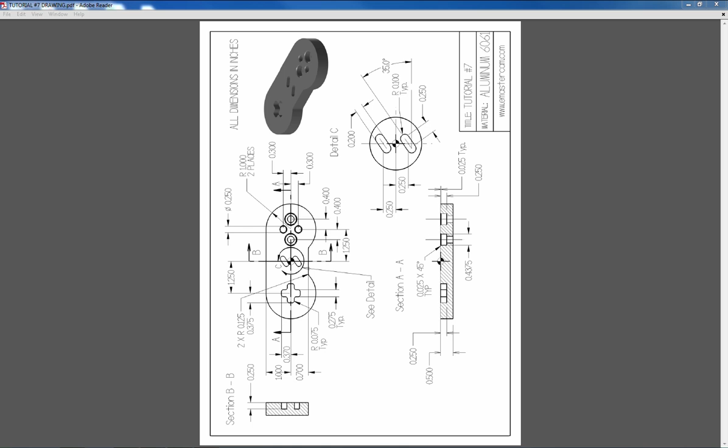Here is the blueprint for tutorial number 7. We will be referencing it throughout the tutorial.

Hello everyone and welcome to Mastercam X9 training tutorial number 7 in the Mill Essential series. As you just saw from the blueprint, that is the part we will be creating in the CAD functions. I've gone ahead and established my grid and changed my default color from a light green to a dark blue. I did this in step 1, setting up the graphic user interface.

Now I'm going to get started with step 2, which is create circle center points. Come up to the top here and select Create, go to Arc, and go to Circle Center Point. From here, we're going to input the radius of 1 and hit Enter on our keyboard.

We are also going to lock in the value. After locking in the value, go over to Fast Point and type in the values -1.25 separated with a comma and 0. Once this is done, scroll over to the right hand side and hit Enter on your keyboard, and then hit Apply.

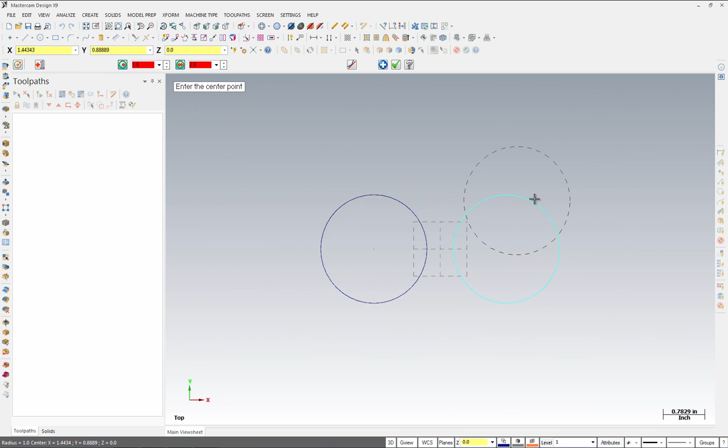From here, we are also going to make another one right beside it. So go to Fast Point again, and this time enter the values 1.25, 0, and hit Enter on your keyboard. As you can see, it's made for us on the other side. Select OK when this is done, and Fit to Screen, so we can see the part more clearly.

From here, go to Create, Line, and Point. We will go ahead and make sure that Tangent is selected. We will select the circle here, and make a tangent to this circle here. Once this is done, select OK. Your part should look as shown.

The next step, we will go Create, Line, Parallel. Once we select the parallel line, we will grab this line that we just made tangent and click somewhere down here. We will go to the distance and insert the value 1.7 and hit Enter on our keyboard. Once this is done, select OK.

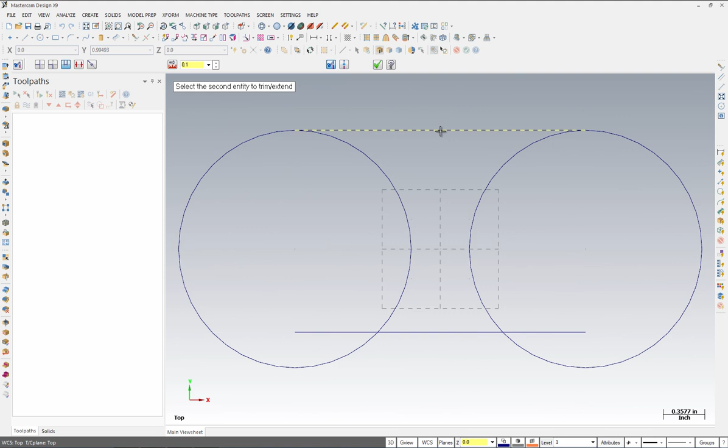The next step, go to Create, Edit, Trim Break Extend, and change the Trim Break Extend to 3 entities. Once this is done, ensure that Trim is also selected on the right hand side. Select Entity A, followed by Entity B, and Entity C.

Do the same for the next side. Select A, select Entity B, and then select Entity C. Your part should look as shown. Select OK when this is done.

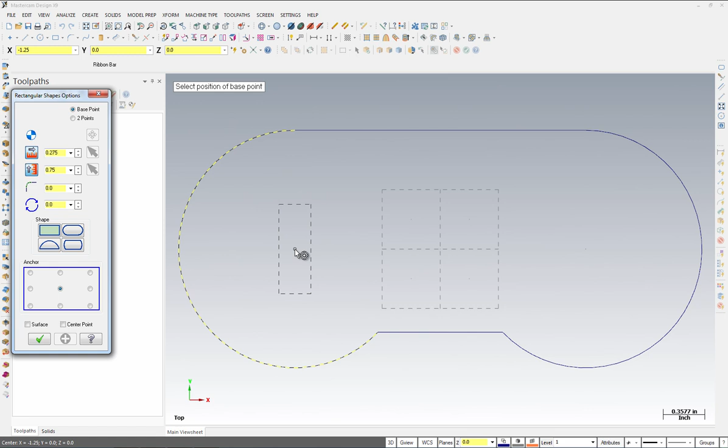Go to Create, Rectangular Shapes. Once this dialog box is opened, change the width to 0.275 and change the height to 0.75, and hit Enter on your keyboard. Also change the anchor to center. Once this is done, come over to the side here and select the circle center point. Select Apply.

Now we will go over and this time change the value of the rotation to 90 and hit Enter on our keyboard. From here, we will scroll over and select the circle center point again, giving the same values, which was 0.275 by 0.75, and hit Enter on our keyboard. Your part should look as shown. Once this is done, hit the OK button.

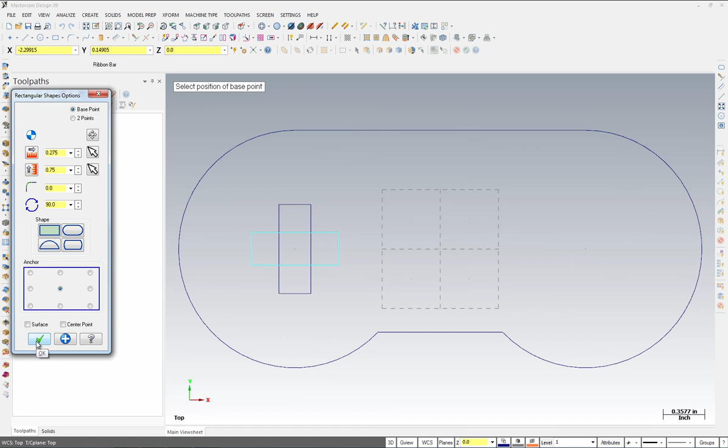Now we are going to trim this geometry. Go to Edit, Trim Break Extend, and select the Divide function. From here, select this line. Continue to go all the way around to clean up the geometry. Your part should look as shown. Once this is done, select OK.

Go to Create, Fillet, and select Chains. Ensure that in the Chaining dialog box, Chain is selected once doing this. Scroll over here, select this chain here, and hit OK. Once this is done, we're going to change the values.

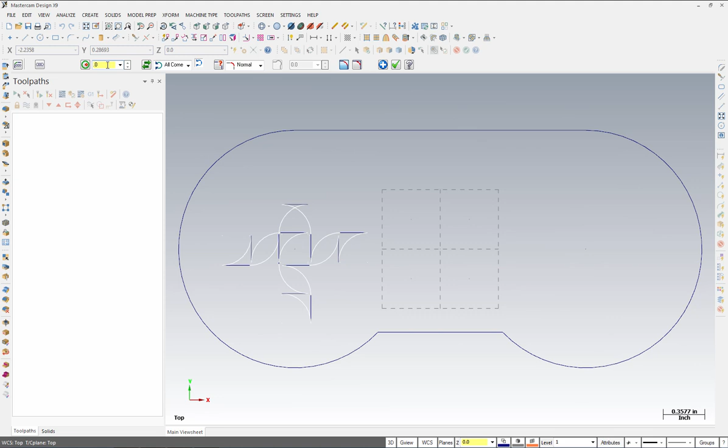We're going to ensure that this value, or radius, is 0.075, and hit Enter on our keyboard. Ensure that the trim function is selected as well. Once your geometry looks like this, select OK.

From here, we are going to create the middle portion of the geometry. Go to Create, Rectangular Shapes, and change the width to 0.45, hitting Enter on your keyboard, and change the height to 0.2. Change the angle to 35, and hit Enter on your keyboard. Since we are making two of these, lock in the values by selecting the icon, width, and height.

From here, we're going to change to this shape, and we are still going to keep it anchored to the center. Once this is done, scroll up to the top without exiting out of this rectangular shape option and select Fast Point. Insert the value 0, 0.25 and select Enter on your keyboard. You should see the geometry as shown.

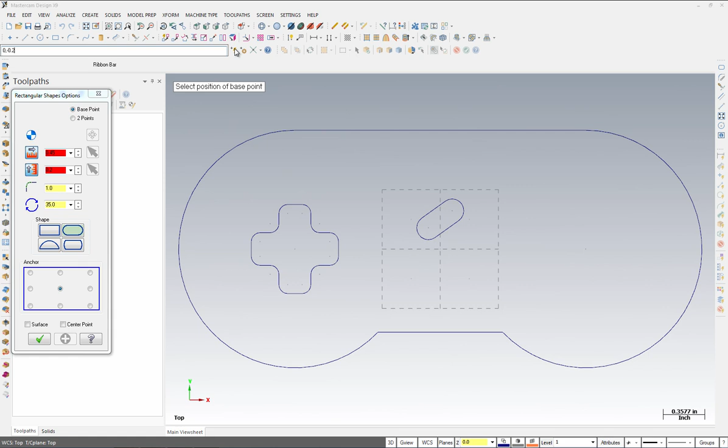From here, select Apply, and go back to Fast Point and type in the values 0, -0.25 and hit Enter on your keyboard once more. When this is done, select OK. Your geometry should look as shown.

Go over to Create and select Circle Center Point. Change the diameter to 0.25. First you need to unlock the value, change this diameter to 0.25, and lock in this value. Once this is done, select the Fast Point.

Type in the value 1.25, minus 0.4, comma 0, and hit Enter on your keyboard. Select Apply.

Go to Fast Point again. This time, type in 1.25 plus 0.4, comma 0. Hit Enter on your keyboard. Select Apply. From here, go back up to Fast Point and type in the value 1.25 separated with a comma.

0.3 and hit Enter on your keyboard. And the last step is to hit Apply one more time, go to Fast Point one last time, and type in the values 1.25 separated with a comma negative 0.3 and hit Enter on your keyboard.

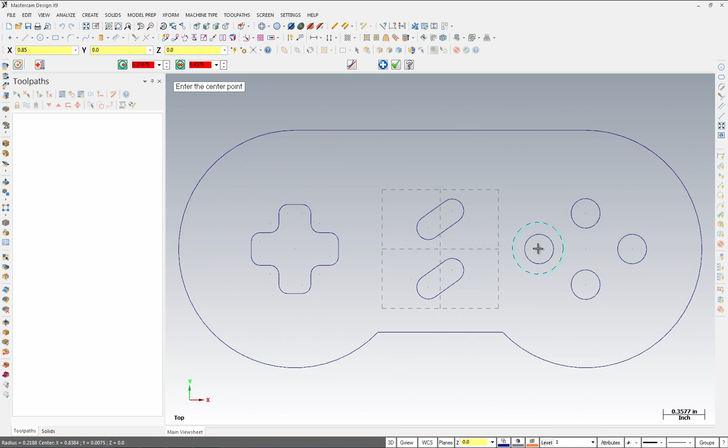From here, we are going to select the circle center point of this circle here, and we are also going to select the circle center point of this point right here. Once this is done, select OK.

From here, we are going to change our attributes at the bottom of the screen. Scroll down to the bottom and select the solid color. From here, select color 12 or red, and select OK.

The next thing to do is to change the status bar and the level. Scroll down to the level and select it. From here, insert the number 2 and change the name to solid. Once this is done, select OK to exit the level manager.

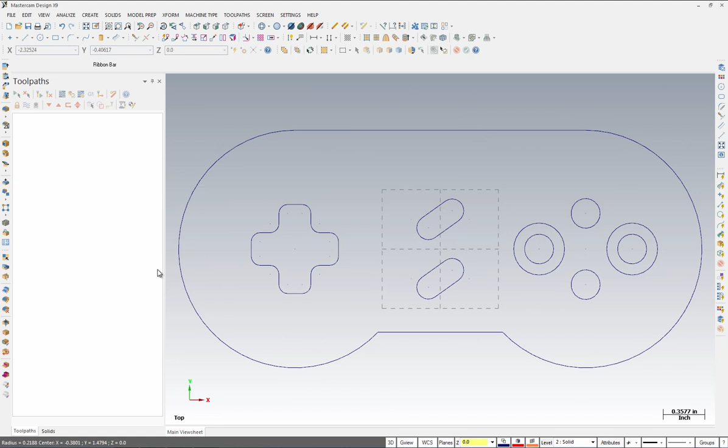Go ahead and start to extrude the surface. In order to do so, go to Solids, Extrude. From here, we are going to keep this same chain under the chaining dialog box, and we are going to select Isometric on the part. Your part should look as shown.

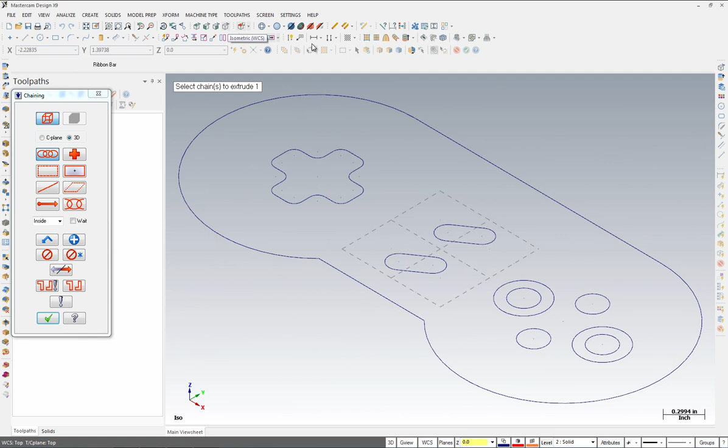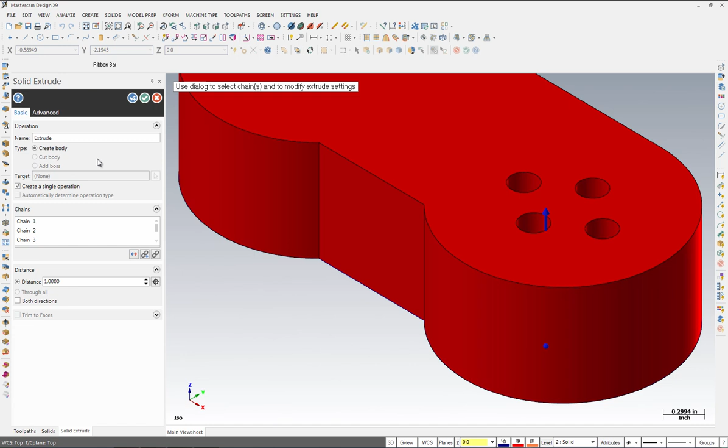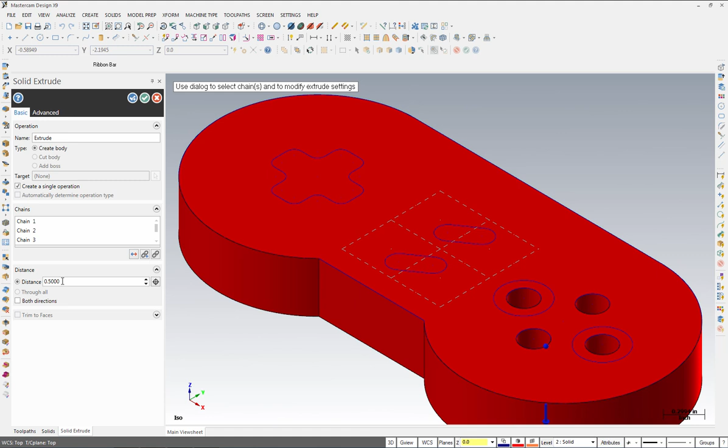From here, we are going to create a single operation, change the type to create body, and we're going to give it a distance of 0.5. Your part should look as shown. When this is done, you can hit Alt-S on your keyboard in order to shade the part. Select OK when finished. Select Fit to Screen as well to see the full part.

Once this is done, go to Solids, Extrude, and select this geometry here, followed by this geometry, this one. I'm going to flip my chain, this circle here, and this circle here. Once this is done, select OK.

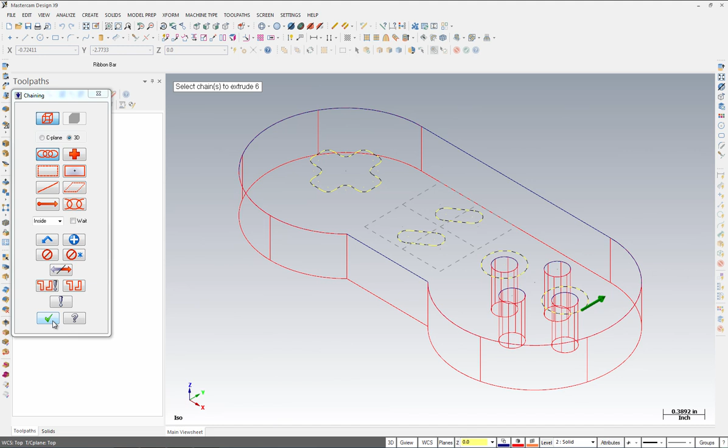From here, instead of creating body, we are going to cut the body and change the distance to 0.25 and hit Enter on our keyboard. From here, we're going to hit OK. I'm hitting Alt-S on my keyboard in order to shade the part once more. Your part should look as shown.

Scroll down to the bottom and select Level, and turn the wireframe off. Once this is done, go over and select OK. And at the very bottom of the screen here, change from Toolpaths to Solids to see your Solids operations. Expand it. You should have an Extrude and an Extrude Cut.

Go to Solids, and scroll down to Chamfer. Go to One Distance Chamfer. Ensure that Face and Body is turned off and you only have Edge selected in this Solid Selection dialog box. Select these holes here. Once all four are selected, select OK.

Change the distance to 0.025 and hit Enter on your keyboard. Once this is done, you will see the chamfer created for the holes. Select OK.

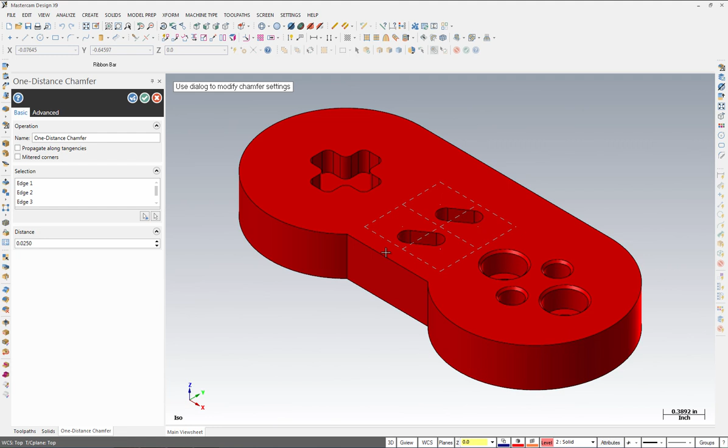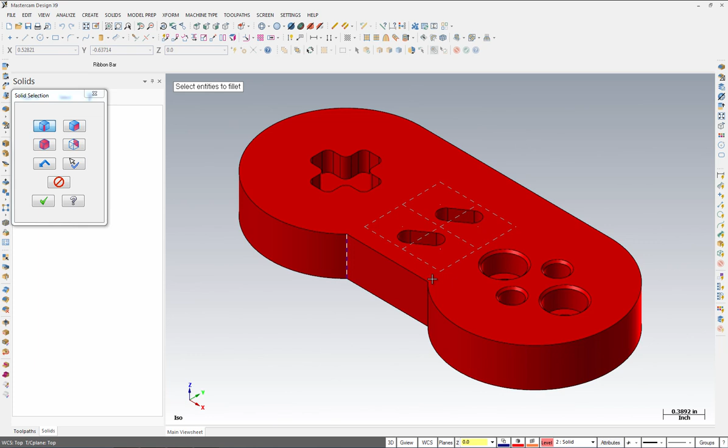Go to Solids, Fillet, Constant Radius Fillet. From here, we are going to ensure again that this is the only operation selected. Edge. We are going to turn off Face and Body, and we are going to select these edges here. You might have to rotate the part in order to see it a little bit better. Select OK when this is done.

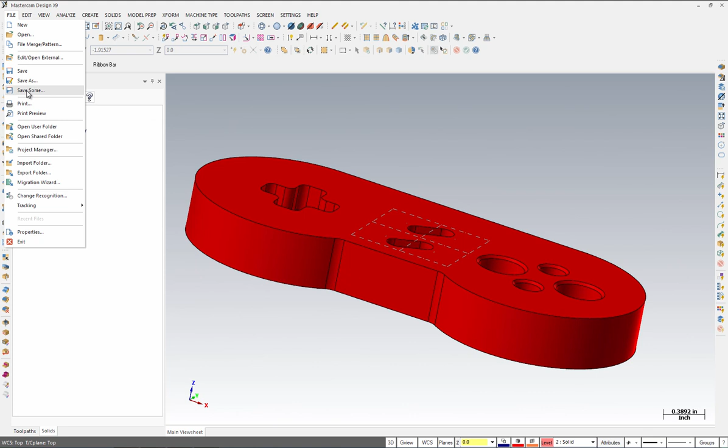From here, change the radius to 0.125 and hit Enter on your keyboard. Your part should look as shown. Select OK. From here, go to File, Save As, and save as tutorial number 7. And hit save on the dialog box.

Change your WCS to top and go to Toolpaths.